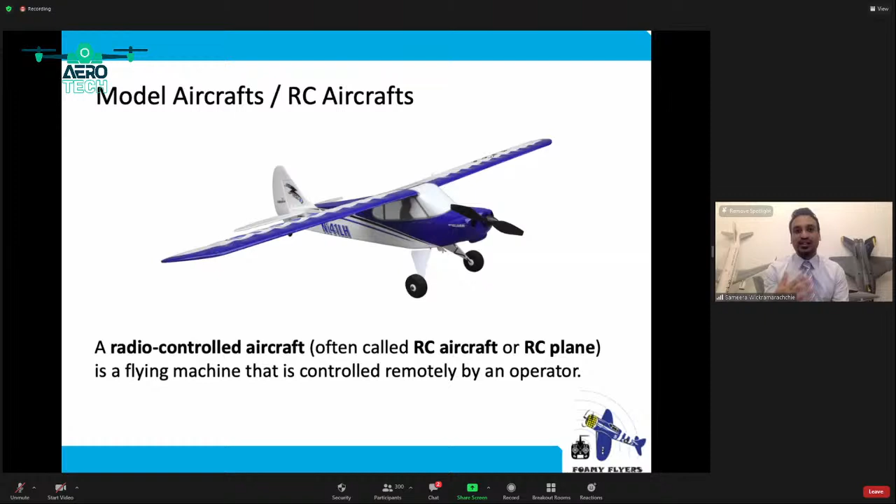And the other thing is, when you talk about a model aircraft, it can be a static model aircraft. It can be on your cupboard so that it looks nice. So we are particularly talking about an aircraft which can fly. So it's not a static aircraft. It's basically an RC aircraft. RC in the sense, it's a radio controlled aircraft. Moving on. Let's talk about the principles of flight first.

So normally you have 4 forces acting on a particular aircraft. These are the main 4 forces. I'm not going to go into very deep details on this, I'm just going to keep it very simple for you guys because of the time constraints that we have right now. And if you have any questions, as I mentioned before, please do ask. So normally an aircraft will have 4 forces. The first of which is the weight of that particular aircraft. That is basically the gravitational pull that is pulling the aircraft onto the ground.

And opposite to that, obviously, if we were to fly the aircraft, we need to have a lifting force. That is the lift, which is basically generated from its wings. And also when the aircraft needs to go forward, it needs to have some thrust. This is generated by a power plant of some sort. And opposite to thrust, you'll have drag. So normally, the higher the thrust you have, the higher the drag. It's like Newton's third law.

But I'm not going to go into a lot of details, let me just be very brief on these things. Right, so now you know that you have 4 forces. These are lift, weight, thrust, and drag. Right. So how is lift created? Like how does a wing create lift?

Let me be very, very basic on this. I'm hoping that you have seen a cutout of a wing. Normally it's cambered, so the top surface is rounded, but the bottom surface is flat. The reason why it is like that is, for example, if you think about two air particles hitting the front of that wing, the particle which goes on the top of the wing has to travel more distance because it's curved than the lower air particle which is traveling on the bottom part of the wing, right?

Does it make any sense? So the path for the lower particle is straight, but the upper path is rounded. That means you have to go further up and then go down to meet at the end point. So the upper particle, which has to go further, in order to meet up with the lower particle, has to go faster. I hope that makes sense.

So when the particles on the top of the wing go faster than the lower particles, you automatically create a vacuum. The particles are less on the top of the wing than the bottom. That in turn creates a low pressure area; the speed of the particle is fast, but it has a low pressure area. And you all know that air goes from high pressure to low pressure areas, right? That is how the wind happens and things like that.

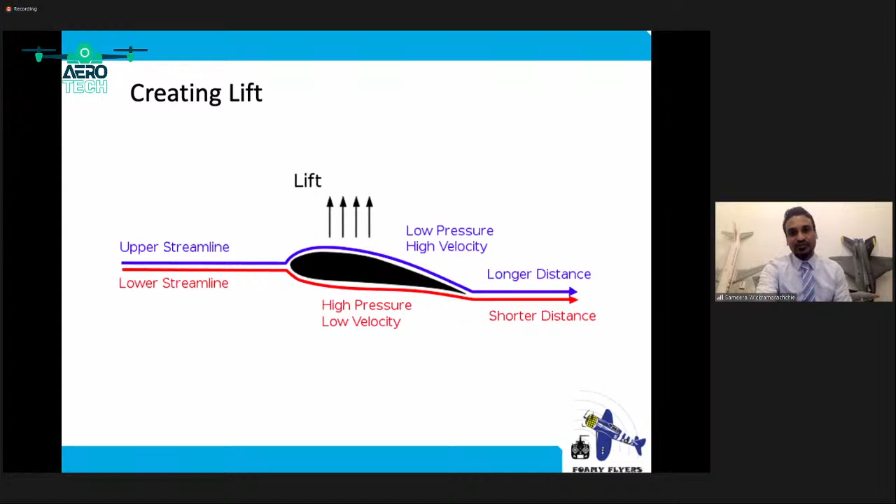Moving on, let's talk about the primary flight controls. Now, this is very important. I will use the words ailerons, elevator, rudder, thrust, and things like that. In this picture, you can see that you have ailerons on both parts of the main wing, an elevator, which is on the back of the tail part of the aircraft, and the rudder.

To give you an example of how these things work, I have a model aircraft. As I told you before, this is a static model aircraft. I think you might know this aircraft as well. This is an A380. So this is where the rudder is, right? And this whole section of the aircraft is called the empennage, or the vertical stabilizer and horizontal stabilizers. So you have the rudder, the elevator, and the ailerons on the corners of the main wing, right? Let's talk about the elevator first.

As I said, the elevator is here. When the elevator moves upwards, the air which comes and hits the elevator pushes the elevator down, right? So when you move the elevator upwards, this in turn pushes the aircraft down from the back, right? So in turn, the nose actually lifts up, right?

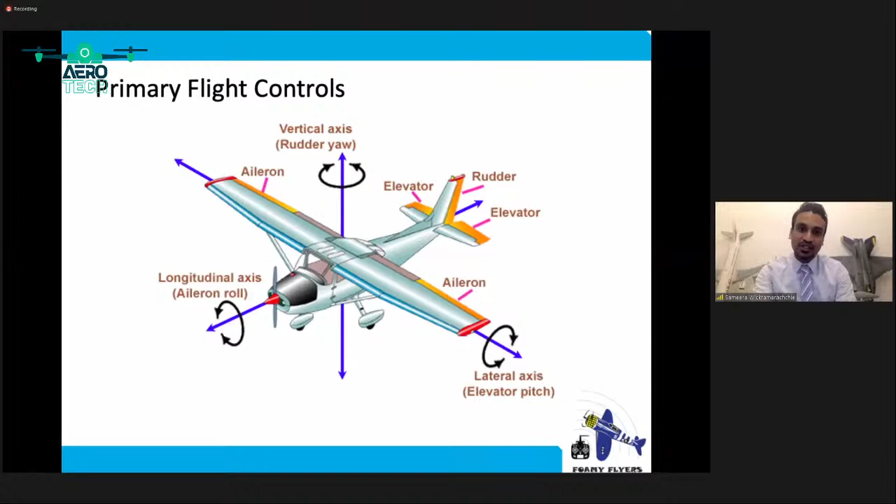I've actually included a bit more detail on flight control surfaces. Obviously you can see the rudder, the elevators, the ailerons, but you have the horizontal stabilizer, as I mentioned, and the vertical stabilizer as well. And also there are something called flaps and slats. Flaps and slats are basically high lift devices. What they do is increase the lift of that wing.

If you remember the previous slide, where I showed you how lift is generated, the lower part of it is straight, right? But what the flap and the slat do is extend the front bit as well as the aft bit, or the trailing edge of the wing, which in turn makes the aerofoil or the wing much more capable of generating lift.

And also you have something called spoilers. Spoilers, as the name suggests, basically spoil the air moving on top of the wing. They're located on top of the wing, and when deployed, they spoil the airflow, which means the lift is reduced on that particular side, or normally both sides, and it's used to slow down an aircraft, or sometimes even to turn the aircraft left or right as well.

Right. So here you can see a flap and a slat being deployed on the leading edge, which is the front of the wing, and the trailing edge, which is the back of the wing. You can see those are extended, and the surface the air particles have to move through is considerably more than when it was retracted. So you have generated more lift, right?

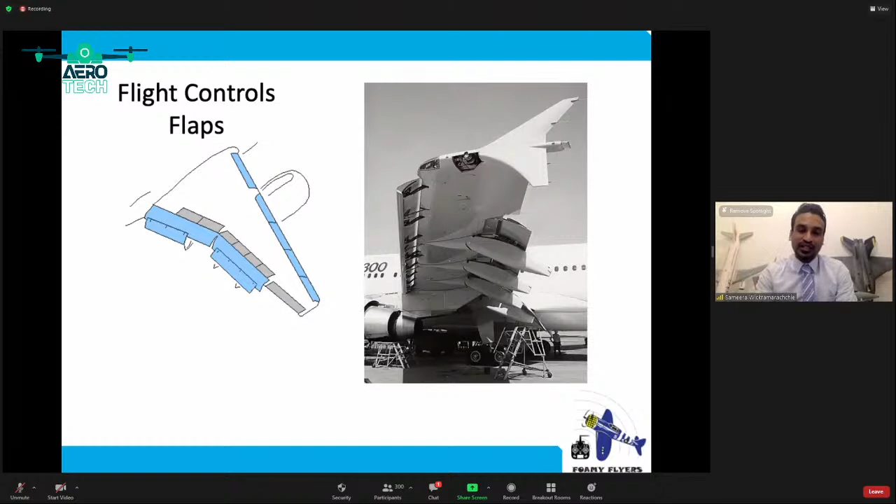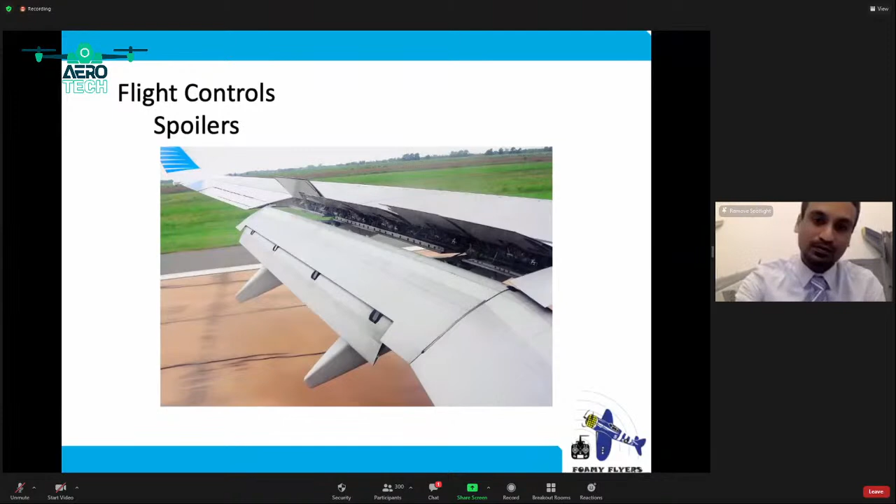Right. So moving on to RC model aircraft. Now I believe you've got to know the basics of flight and how an aircraft works. Now let's build an aircraft. But before we build one, we need to figure out what sort of aircraft we want to build, because some people might be very good at flying an aircraft, and some are not that good because they need practice flying.

So if you're a newbie getting into this hobby, I would strongly recommend buying or maybe building a trainer plane. Trainer planes are very easy to fly. They have very limited capabilities, such as banking. The aileron, elevator, and rudder controls I told you about before are limited, so it's easier for a user to fly the aircraft and learn the basics of flying an RC plane. And also you have gliders.

A glider is basically an aircraft which uses thermals. On a hot day, you can see that the air is moving up. Sometimes you can see tornadoes and things like that. Those are called thermals. Sometimes you can even push the aircraft through the air and it flies itself without any thrust generated on the aircraft. That means you don't particularly need an engine or a power plant for this, but you can fly it as a glider.

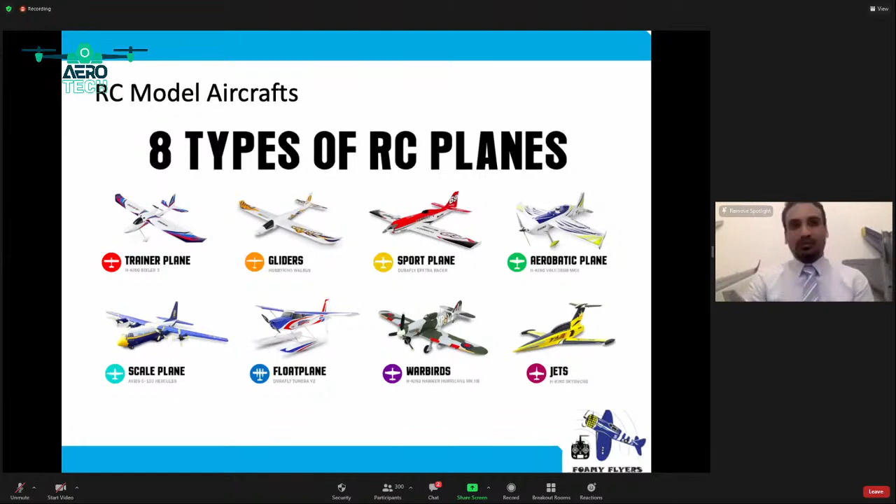But before that, let's talk about the basic requirements we need to build this particular aircraft. So airframe, those 8 airframe types you can basically buy or build as well. Power plant, you'll have to buy from some company. And electronics, transmitter and receiver, batteries, and optional accessories, which I'll talk about in much more detail in a few more minutes. Right, let's talk about the airframe.

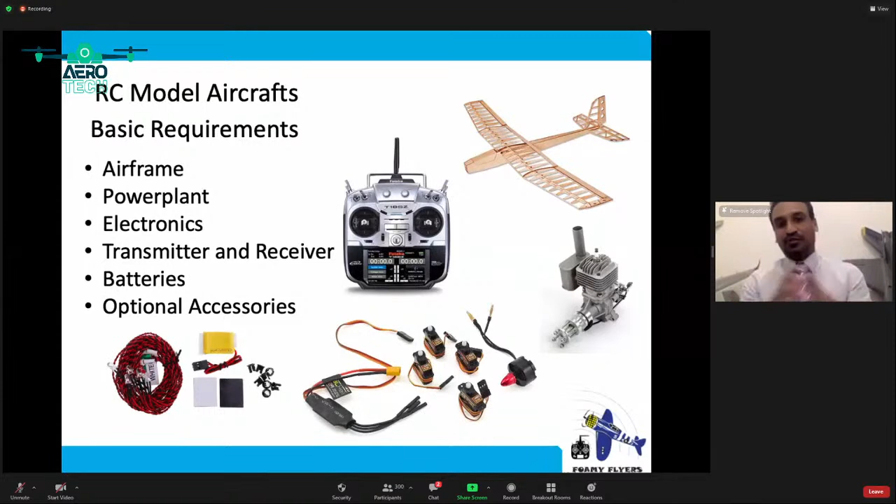So now if you have decided on an aircraft that you want to build, you can choose from either foam or balsa. These 2 materials are the most commonly used, in Sri Lanka and in other countries. Now, foam and balsa wood aircraft have different plus and minus points. For example, foam, or EPO, EPP, to put it in very basic terms, is basically a rigifoam.

A rigifoam aircraft, you can carve it at home, you can cut it with a knife, you can sand it down, you can make a lot of shapes with it, which is very easy. And obviously these materials are very easy to find. So most of us tend to go with either EPP, EPO, or maybe another material that is very easy to use.

Do we have a question? Hassan, do we have a question? I see somebody has raised their hand. Yes, sir. I don't see any questions here on my chat. So if you can narrate them to me, I can answer. There are a few questions. Yes. Right. So we do have a question.

How to define propulsion efficiency? Right. Propulsion efficiency is basically about the prop size and the motor. So basically, what's the power that you're giving to that particular motor and the output that you're getting from that particular motor. I will talk about these things in a bit more detail in a few more slides, but just to answer his question.

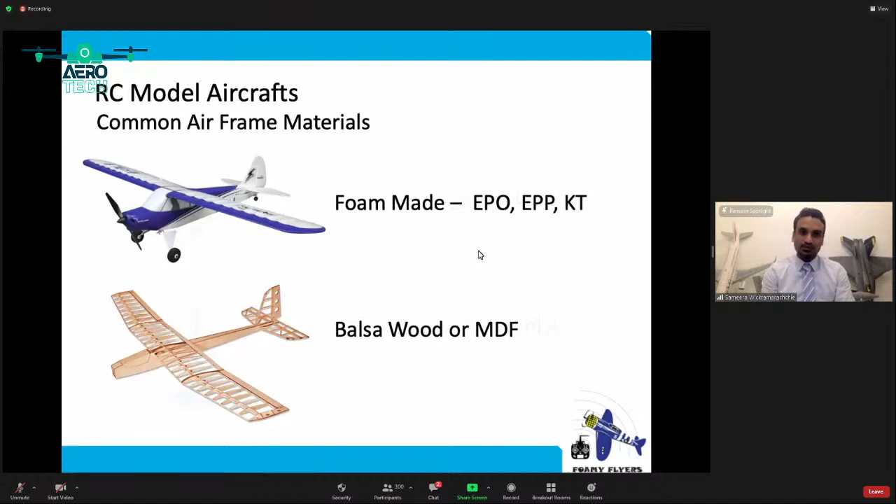But the only thing with this RC hobby, what you need to understand is eventually you will crash your aircraft. So when you crash it, you need to know how to repair it as well. So when it comes to balsa, especially when you spend quite a lot of money laser cutting it, or else you can even do it at home with some tools, but it's very difficult and time consuming. And if that particular airframe crashes and you have a breakage on the wing, then you'll have to replace the whole wing because it has been covered and everything has been done.

So moving on to other materials, apart from these two, we have fiberglass as well as carbon fiber. Nowadays, a lot of manufacturers tend to use fiberglass and carbon fiber because strength-wise they are very, very good. Only thing is that if you were to build something like that at home, it's very costly and the materials are very hard to find, and it's very, very difficult to manufacture at home.

So because of that, unless people are going into the hobby in a very serious manner, for example, designing newer aircraft which can withstand a lot of heat or resist water and all those things, you can build out of carbon fiber or fiberglass. But the process of building one is relatively harder than building it out of KT or MDF or things like that.

And then, as I mentioned, a newer technology which we have right now is 3D printed aircraft. The easiest part is that you get to print the aircraft at home and then glue it together. And the best thing is if you crash it, you can print that particular section and glue it back together as well. But it takes time. Normally 3D printing an aircraft will take quite a lot of time. The other thing is that if you are very good with design software, you'll be able to design your own aircraft at home and then fly it and test it without having to download somebody else's design, which in turn means you'll learn more about how it works.

You now know how an aircraft works, how we need to get things working, and you get to know what you have built without having to buy it off somebody or download it from another place and print it. And the other thing is 3D printing is getting very, very inexpensive, because a lot of people started doing it, and even 3D printers are relatively inexpensive.

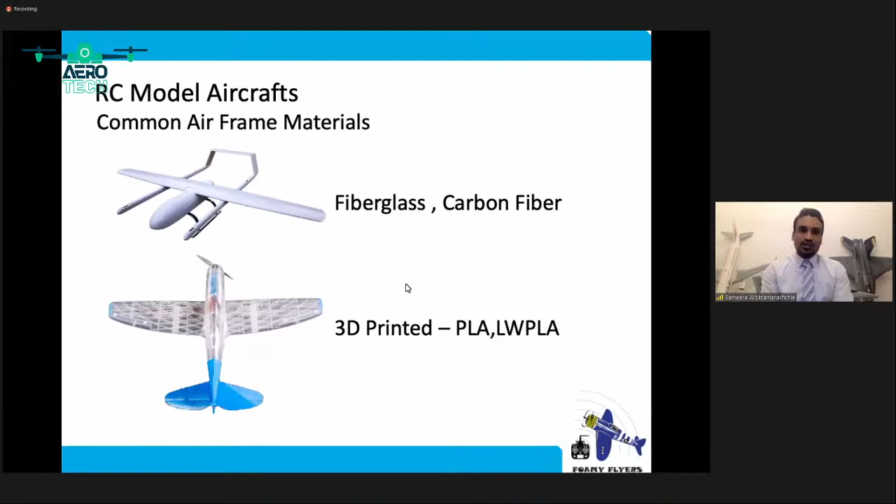Okay, so now you have selected the material.

Hassan? Yes, sir. I'm getting this request to control my screen. Is that from you guys? No, sir. You can just continue with the session, sir. Yeah, because I have to keep on declining that every time. Anyway. All right, sir. Don't worry. Our technical team would look into it, sir.

Sure, thanks. So now you have decided on what are the materials that you want to build the aircraft. Now we'll talk about what are the common aircraft frame types. For example, you can have these particular types which are in the picture. Normally, the most commonly used aircraft type is the straight leading and trailing edges wing, which is very good for training newer pilots on the behavior and how to fly an RC aircraft.

And the other thing is, when you're talking about delta wings and swept back wings, those particular aircraft need a bit more speed to fly. So when you have more speed, it's pretty difficult to control the aircraft unless you're a bit of a seasoned pilot. Or else, if you are good with flying an aircraft, these two are good opportunities for you to enhance your skills in flying an aircraft.

And when you're talking about common airframe types, these 6 are not the only types that you can build, there are others. For example, where the wing is mounted comes into play as well. So you have 3 different criteria for your wing: high mounted, mid mounted, or low wing. So likewise, you can choose the airframe type you're going to build and how the wing has to be mounted, and depending on your requirement, you can choose how to build your aircraft.

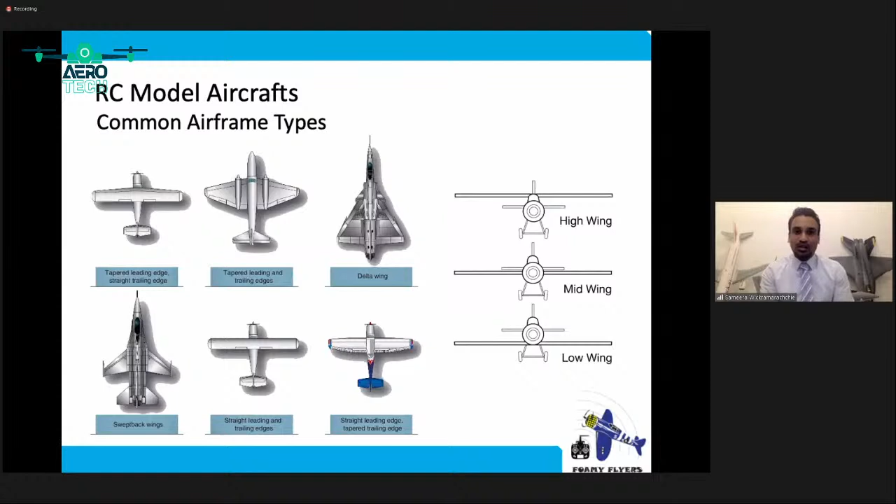What I'll do is I'll share some links where you can go and download your particular plan. There are some sites I'll put on your chat at the end of this session, so that you can have a reference of the available aircraft. And you can even choose whether to have it 3D printed or made out of KT or foam boards as well. So you have that option as well.

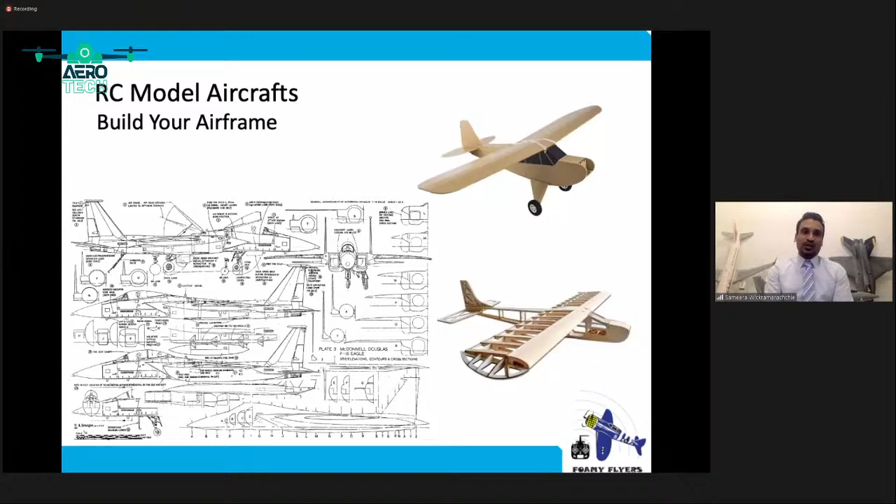Okay, now let's get to the power plant. Back in the day we did not have such efficient power plants, especially for RC aircraft. Some people even used rubber bands, which rotate the propeller and move it forward. But nowadays the technology is much more advanced, and we're using what is called a brushless motor. Brushless motors are defined by their particular kV ratings.

So over here, I have a brushless motor. This is connected to a propeller, obviously. And as you can see, this has three wires coming out of it. I'll show you what it actually does. Normally, a motor would have only 2 wires, but this one has 3. And this is rated at 1400 kV. kV is the constant velocity. That says that this particular motor rotates 1400 times per minute at a given 1 volt.

So you can get the idea of how many rotations it does, but it does not mean that the higher the kV, the more power you have. It does not work like that. For example, if you get another motor, this has less kV. This is around 750 kV, but this will have more power than the 1400 kV depending on the propeller it uses.

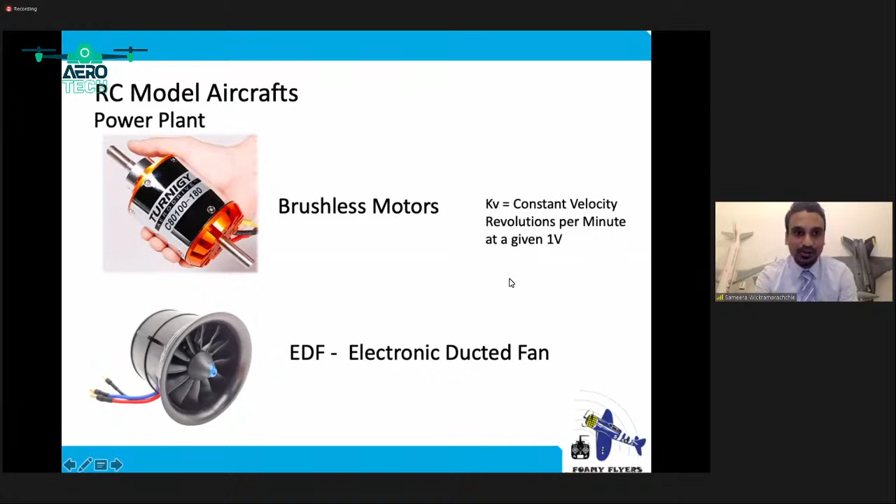And also, there are nitro engines. I think these are very commonly used for balsa wood aircraft. I'm not saying that these cannot be installed on KT boards, but normally, as you know, when you have a piston which is going up and down, there will be a lot of vibrations. Because of that, the vibration will make the airframe very unstable. That's the reason why this is only used on basically either...

Somebody's in the waiting room. I'm getting those messages. Hassan, can you check on that, please? Sir, it's better if you could just ignore the access and just go on, sir. Okay, right. Are there any questions since I stopped? Yes, sir, a few questions. I'll just shoot out one.

So the question is, can you please suggest any open source or free aircraft designing software with simulation? Sure. Normally, if you were to design an aircraft, I would suggest going with XPlane. This is something that I used when I was doing my degree. On that, there's a separate section called plane design or something like that, which I can't remember. But you can basically build your aircraft. You can give all the parameters to it, design the aircraft to those parameters and even test it on that particular simulator.

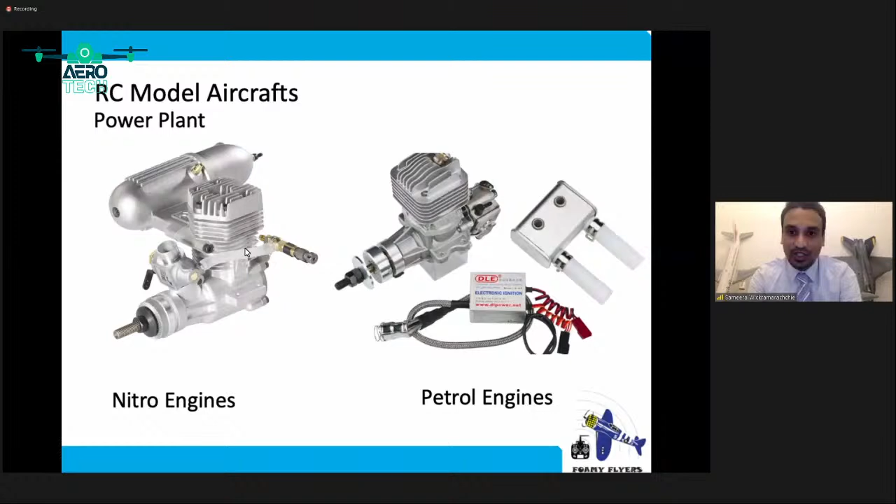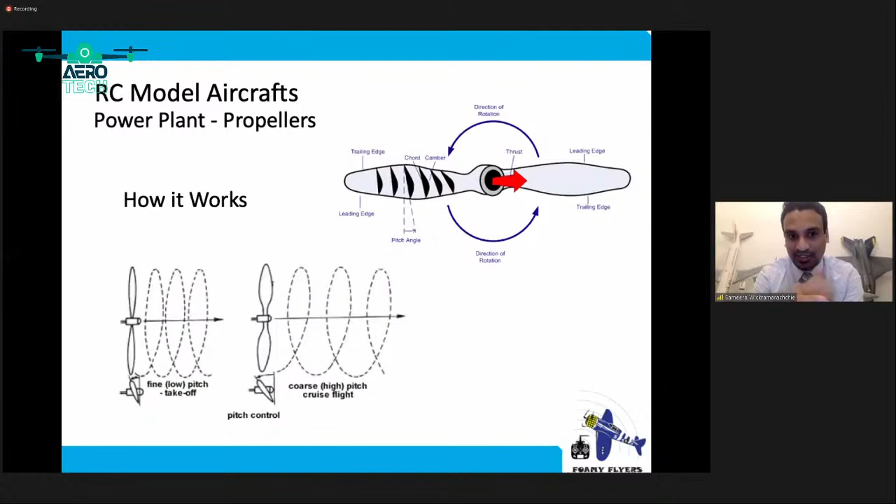And going on with the power plants, obviously we talked about the propellers and how they work. Just to give you a brief introduction, a propeller basically works like a screw. It rotates and it goes forward. Normally a propeller is actually a wing, but it's rotating on a certain axis. So similar aerodynamics and effects apply to this as well. But just for you to know, this is how it works. And as I said, it works like a screw. And also to talk about the propeller sizes.

Now, I have some propellers here. This is a carbon fiber propeller, which we normally use most of the time in normal aircraft. And this is a plastic propeller. And we have another propeller, which is much harder and much more resistant to bending and all. So these two are pretty much different.

We don't use this particular propeller on an electric motor. This is actually there so that you can use it on a nitro or a normal engine. The reason why it is harder is that this is made out of another material than this one, so that this is not going to heat up. And the other thing is that this is not prone to vibrations as well. I'm not saying that these are not vibrating.

The tips actually do vibrate, but because we are using it on an electric motor, that's actually been counterbalanced as well. The other thing is you need to balance your propeller on a stand. If you search on YouTube or things like that, you'll be able to know how to balance your propeller. Those are basic stuff. Normally you don't need to, but I would recommend that you balance your propeller before you install it onto your airframe.

And talking about propeller sizes, I mentioned that normally a propeller size is mentioned on the propeller. So in this particular case, it says 12 by 6. 12 is the diameter of the propeller, in inches. And 6 is the pitch of the propeller. So normally, if the propeller is rotated one rotation, in ideal conditions, the propeller should move 6 inches forward.

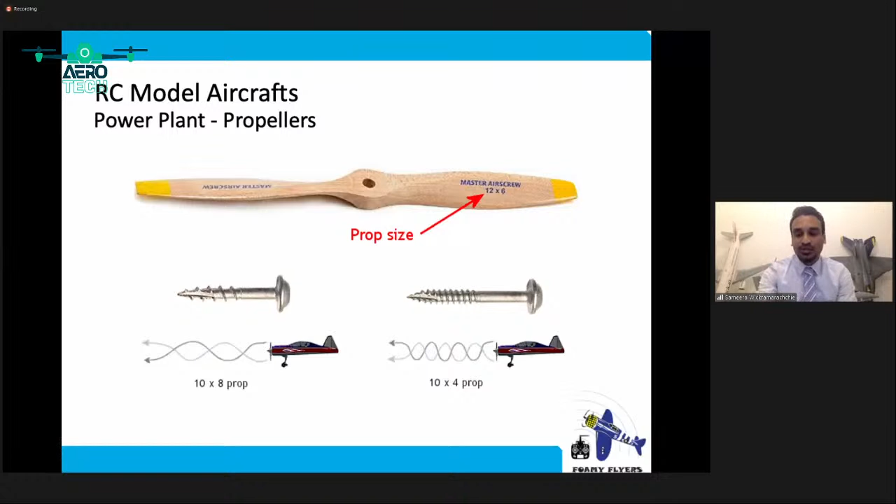For example, you can use a 12 by 6 propeller, and on the same motor you can use another 10-inch propeller, which has less diameter. That means obviously the thrust is going to be less. However, the motor loading will be less as well. So you'll have to consider those things as well. Right. So there are so many variants of propellers that you can choose from.

For example, if you were to go with a scaled aircraft, let's say you're going to build a C-130 Hercules or something like that, if you see the real aircraft, you can see that it has 4 blades on a propeller. It doesn't necessarily mean that you need to put a 4-bladed propeller onto the scale model that you're building, as long as the propeller will give you sufficient thrust to carry the aircraft forward or fly the aircraft.

And also there's something called variable pitch propellers. Even nowadays, a lot of aircraft use it, but we're talking about RC models here, so not a lot of people would use it on RC models, because these are a bit complicated. But you can have variable pitch propellers as well. That means the pitch of the propeller will change according to your need, and then you can have better performance depending on the flight status. Okay, moving on.

Hassan, do you have any questions? No, so we can continue. Okay.

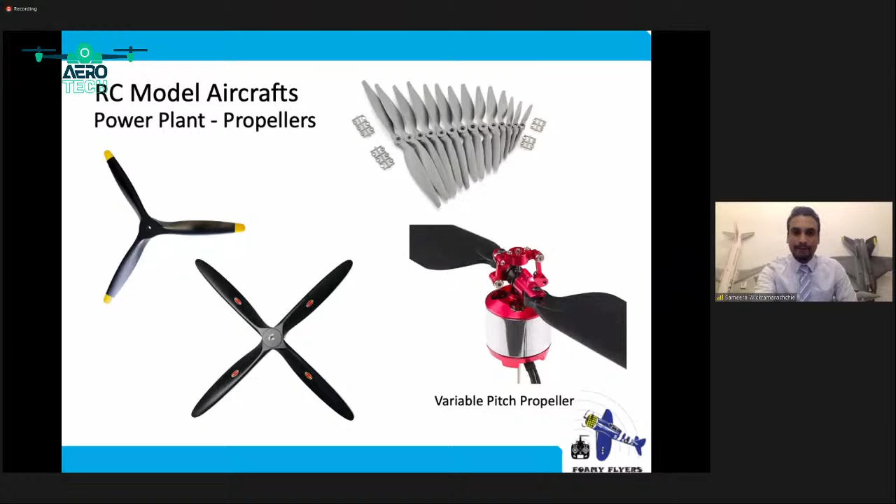Right. We'll talk about the electronic speed controllers. That's one of the main things which powers this particular aircraft. When you say power, you would think, okay, you put a motor, you put the battery, and then you fly. That's not how it's going to work. You need to have a speed controller to control the speed of the propeller, so the speed of the motor in a sense.

What a speed controller does is get the power from the battery and then distribute it to your aircraft as well as to the motor. So now I have a speed controller here. This is rated at 35 amps. You can go way higher depending on your requirement, and they will get much more expensive as well. These are around 2,000 rupees or something. But having said that, you can increase the efficiency of the aircraft by changing these as well.

And the other thing is, this is for electric motor driven aircraft, and there's another requirement: if you're not flying an electric motor driven aircraft, let's say you are flying a nitro aircraft, then obviously you need something to power it with. So there's something called UBECs that you can get as well. What it does is the same thing. You get power from a battery and then distribute it without any interruptions throughout the electronics that you have on your particular aircraft.

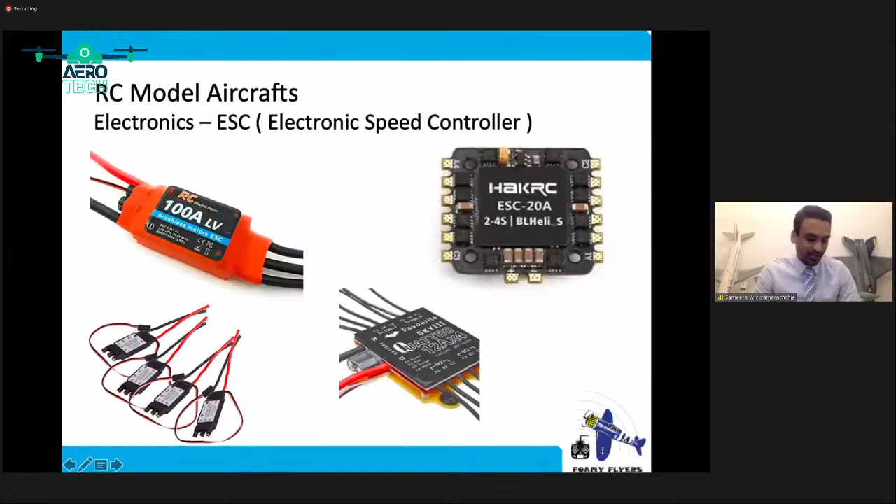Right. Let's move on to servos. So servos are used to basically, the main priority of the servo is to control the control surfaces of the aircraft. So aileron controls, elevator controls, rudder control. And if you have a nose wheel, normally a nose wheel to steer the aircraft is basically connected to rudder. So you'll have to have a servo to steer it or move the surfaces up and down.

Now, most commonly used are micro servos and nano servos as well, but there are standard servos that you can get as well. So this is a standard servo. This will have a rating on it and how much torque it generates and things like that. And also it will have power ratings as well. And this is a micro servo. So you can see the size differences as well. So as I mentioned before, depending on the requirement of the aircraft that you want to build, you can choose whether to have this or the bigger one.

And the other thing is, the reason why I have the internals of the servo mentioned on this particular picture is that you can have servos which have gearboxes made out of metal as well. So obviously when you have metal gearboxes, then you can have more torque on those servos.

So for example, I have this KT build aircraft here. You can see you have 1, 2, 3, 4 surfaces, which are connected to only two servos. So because you have 4, basically one servo runs 2 surfaces, and if you were to use a normal servo, then obviously that will tend to break because of the power that is required to move those surfaces. Because when you're flying through the air, the surfaces will have a bit of air resistance to move up and down. So you'll need more power. Because of that, we have metal gear servos, which I have included on this, so that it will be easier for the servo to move up and down.

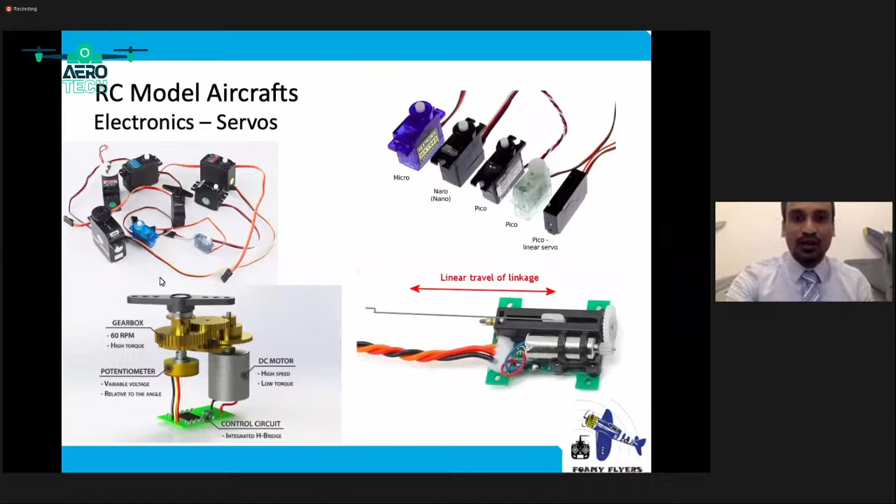So when you are designing or building an aircraft, you have to consider what sort of servo you're going to use. Especially, you don't need to use a bigger servo if you don't need that much power, and that in turn will save a lot of weight and a lot of money as well at the end of the day. Moving on.

Okay, this is the most crucial part of the build, I would say, because a lot of people would say that RC hobby is very expensive. Partly it's because of this. You can buy a very cheap radio and a very expensive radio. The prices vary quite a lot. However, it depends on your requirement, as I mentioned before. If you're spending quite a lot of time building an aircraft, you would want that to last. As I mentioned, you will eventually crash it one day. That is how it is.

However, you don't want to have a bad radio or bad radio communication within the aircraft and make it crash because of that. So you would want something reliable, something very good, so that you have a solid signal, that you will not get any interference from other parties, and that you will have a proper connection to the RC aircraft.

Right, let's move on. So as I was mentioning, there are basic transmitters as well as advanced transmitters. Now, when I say basic, you might remember that I told you about all the control surfaces like ailerons, elevator, rudder, and thrust, or the power, has to be there. So ailerons will take one channel, elevator will take one channel, rudder will take one channel, and thrust will take one. That means 4 channels already gone.

So if you were to buy a transmitter which has 4 channels, you can easily fly an aircraft with all these functions like elevator, rudder, and ailerons. And the other thing is, if you by any chance have a radio which can only manage up to 3 channels, what would you do? Like, okay, now you need to go up and down. So obviously that needs to be there.

So elevator control, obviously you need to have. That's one channel. And then you need to have thrust, that is onto your motor. So that's channel number 2 gone. So you have ailerons and rudder. What would you choose? You only have 3. So my recommendation for you guys is to use the rudder,

because the ailerons and the rudder basically do fairly similar things. As I mentioned before, rudder is the one you use to steer the aircraft, and ailerons turn or bank the aircraft. But when you're using a rudder input, normally an aircraft would tend to turn or dip to that particular side anyway. That's why you normally use something called a coordinated turn.

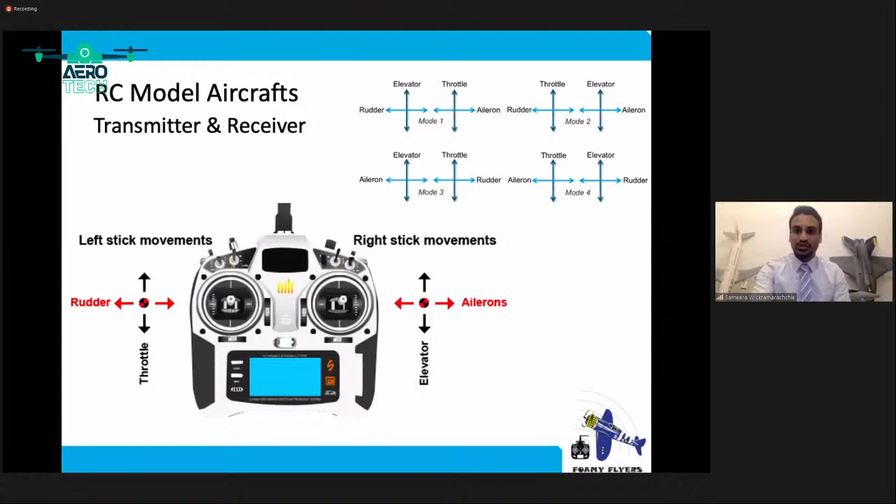In this picture, you have a Futaba receiver, and I have a Futaba receiver here, which came with my transmitter. Normally, when you buy a transmitter, you'll get a receiver, but if you want more receivers, you can buy them separately. These are a bit expensive compared to normal receivers. This one would cost you around 15,000 rupees. So even if you have an aircraft which costs less than that, the receiver and electronics will cost you quite a lot. So you need to have your aircraft in tip-top condition.

And I know that your first aircraft will eventually crash anyway. You'll have to be ready for that, and be ready to rebuild it again as well, so that you learn from your mistakes and know where to improve.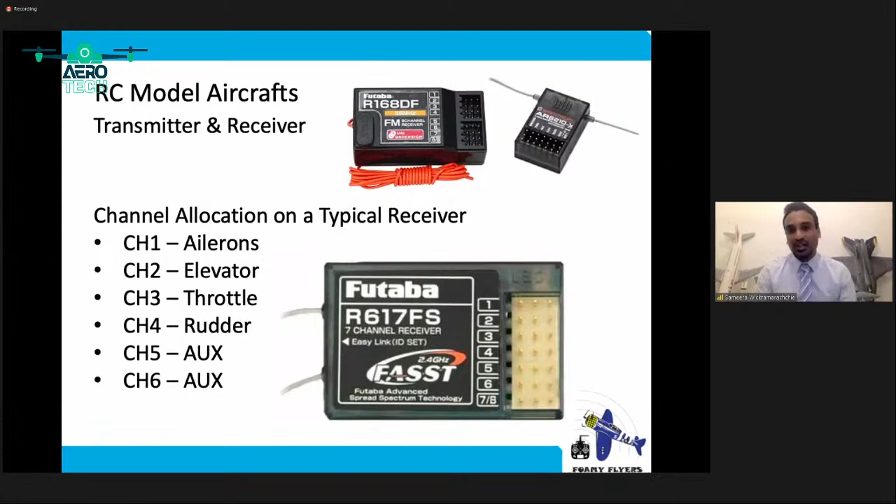But some radios might not have that feature. So if you have something like that, then you need to check all these control surfaces and control levers are at the right position before you turn on your particular aircraft. Because there are some instances where when you plug in, the motors will start and then injure somebody, or maybe damage the aircraft or somebody around you. So that's how it is when it comes to receivers. And then you have to wire it properly as well.

So when I said wiring it, when it comes to servos, you have this connector here. This is always color coded. Normal color coding is basically white, red and black, but nowadays you can get cables which have orange, red and brown as well. And there are older versions which had blue, red and black as well. But any of these has to be connected at the right orientation. The white carries the signal, and red and black are for positive and negative power.

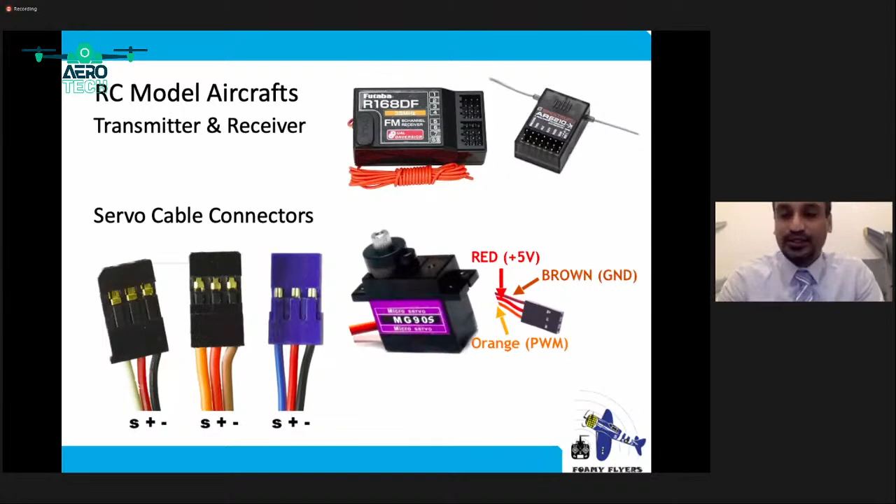Right, let's move on. Now, this is also very important. Hassan, were you going to ask me a question? So I'm sorry to interrupt.

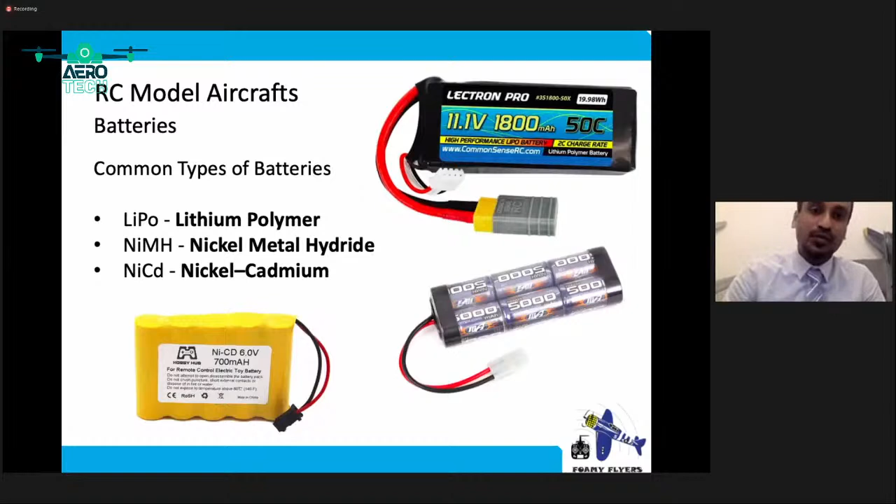These are not to be messed with. This has very high discharge rates, and especially if that particular battery is damaged, it is more prone to catch fire and things like that. So we need to be very careful with that, and especially if you have a crash and you have a damaged battery, I would suggest that you do not use it and dispose of it as mentioned by the manufacturer. This picture shows how the battery is connected together. It's connected with cells.

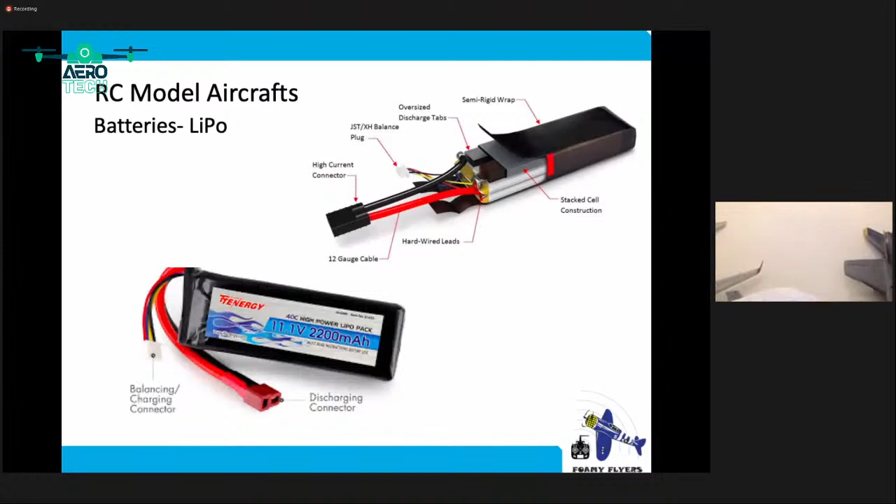I have some batteries here. Right. So normally a battery would have a connector, as I mentioned before. Because the battery is connecting to the ESC, you'll have to have the same connector on the ESC side as well. I'm not necessarily saying that you have to, because there are some converters that you can get, but it's easier for you if you have the same connector on your ESC as well.

So for example, this is a battery which is rated at 1500 milliamps. This is a 3-cell battery. You can see the cells here, 3 of them. And you have this balance charging port here. This is what you use to balance charge the 3 cells. So basically it will charge the cells individually and then they will be balanced out as well. And then this connector is the discharge connector. You have it on a Deans plug or a T-plug connector. So if you were to have your ESC connected, you can basically connect it straight away, right?

But if you have a battery which has an XT60 connector like this one, you cannot connect it. So either you remove this connector and replace it with an XT60, or you'll have to get an XT60 to Deans converter to connect it. But if you're building an aircraft, then obviously you should be able to change this over, or when you're buying your parts, you can choose what the connector type has to be.

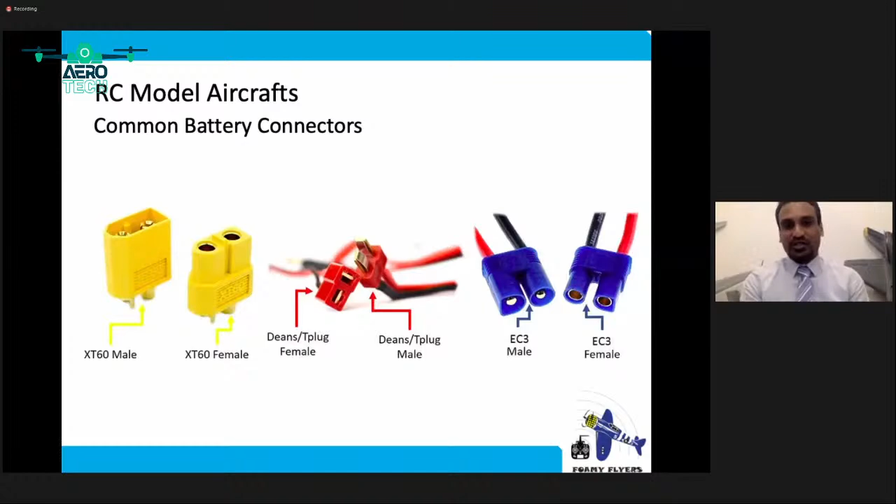And let's talk about battery charging. Now you cannot charge a LiPo battery in a normal charger or power pack or anything like that. You need to have a balance charger for that. Otherwise, the battery will be dead before you know it, or damaged. When you have a balance charger, the charging will be maintained properly. Otherwise, you might end up having a burst battery or maybe fire damage as well.

And the other thing is you'll need to have something like this, if you can, to store your batteries when they're charged or not used. Because this is a fire retardant material, if you have a fire in the batteries, it will be contained in this. So, as I mentioned, you need to have a balance charger for this.

And the other thing I want to show you, this is actually a battery cell checker. So if you are out in a field and you want to know the battery levels are good. Normally, with normal batteries, we use them until they drain out. But for LiPo batteries, you cannot do that. You need to have a bit of power left, like 20% on this particular battery. If it goes beyond that, it will damage the battery.

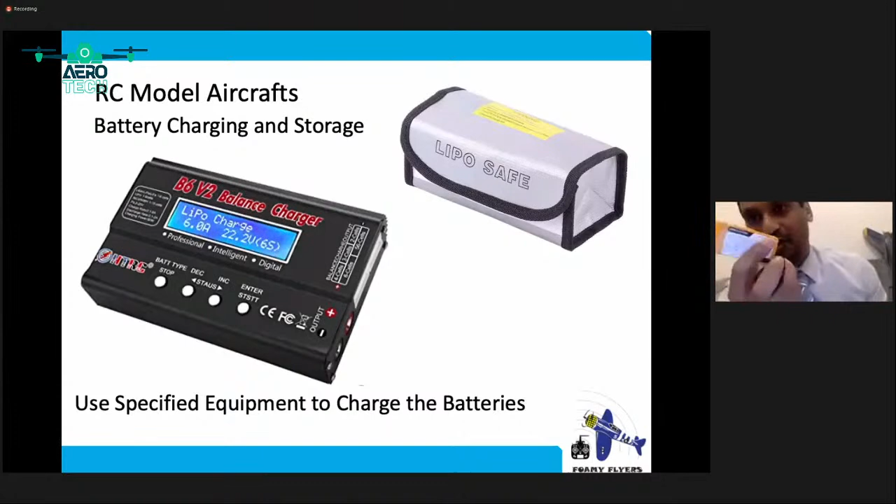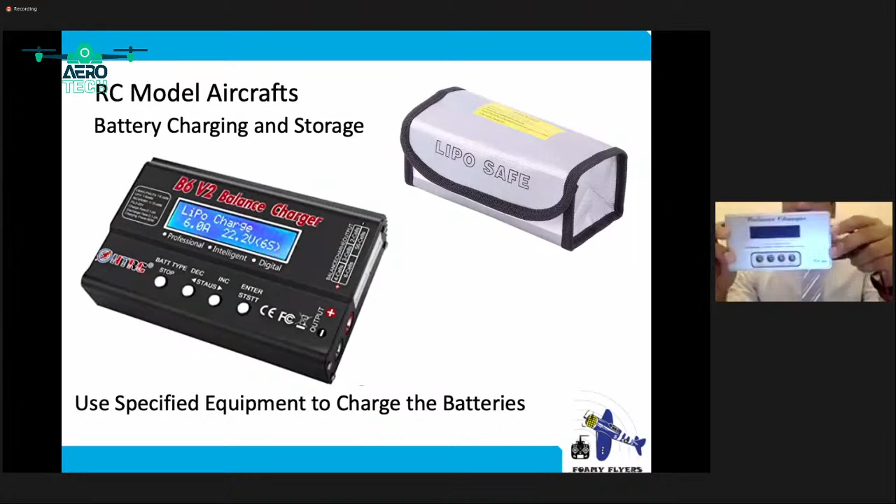Because of these COVID issues and all that, I have not been able to use this battery for a long time. Now it has started a bit of a puffing effect, which is not a good sign, because it has to be discharged if you're not using it. On this balance charger, I have one right here, there's an option to discharge. So what you need to do is discharge your battery if you are putting it into storage or putting it away because you're not flying.

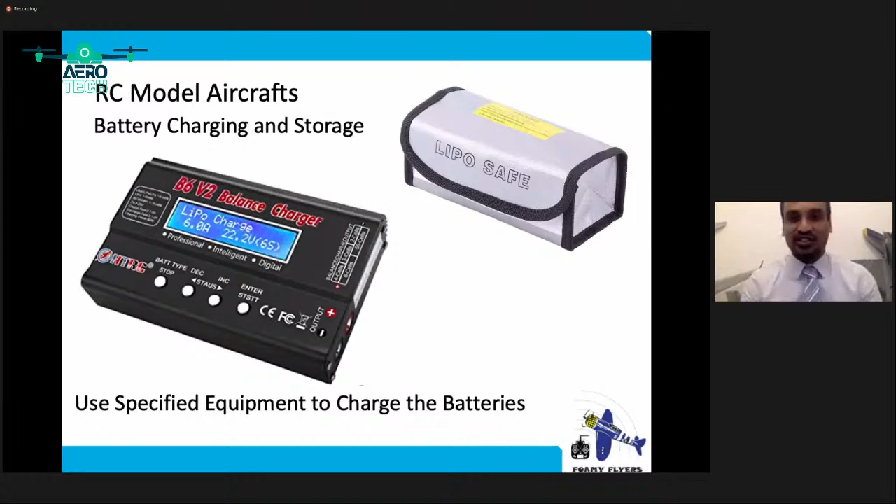Normally we used to fly every Saturday, but since we're not doing that, might as well get all the batteries discharged and keep them in a safe place, like a safe bag. So if your battery is like this, I would highly recommend throwing it away, not just throwing it away, but disposing of it carefully as per the manufacturer's information.

Now, I have a battery here. I think you can see the difference between these two. So this is puffed up. It is in a bad state. I would not recommend using this because it might be able to hold power, but when it is getting discharged, it might catch fire as well.

You might be flying your aircraft and the battery gets heated up to a point that it catches fire, and then it might do a lot of damage to your aircraft and to people below it or some property as well. So you need to be very careful. And especially when the batteries are charging, you need to keep a proper eye on them, to know whether the cells are charging properly or not.

And you need to check regularly, because normally these batteries take around half an hour to 45 minutes, depending on the cells and the amperage of the battery. So you need to check whether it's being charged and that there's nothing shorting in the circuits. We've seen a lot of people having very bad experiences when batteries explode. So you'll have to be very careful.

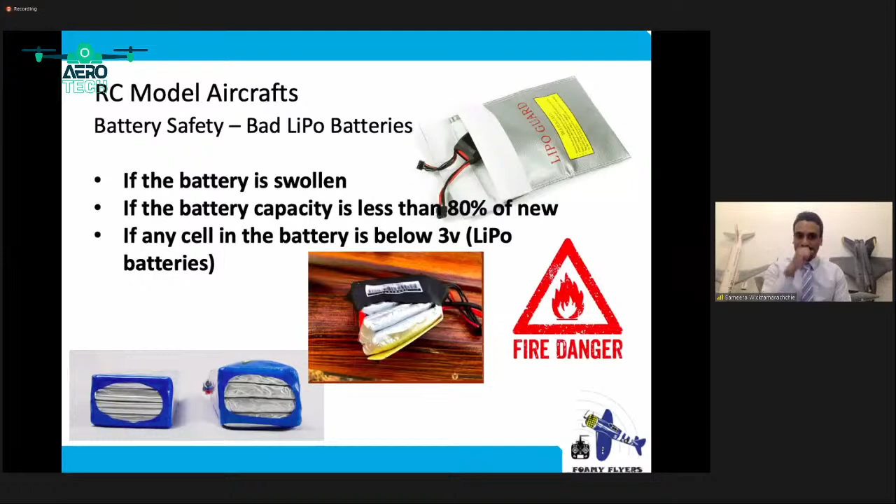Right. Let's talk about model aircraft optional accessories.

Onto your particular aircraft, but let's keep it as a model aircraft for now. So you can even install something like a landing gear set. So this is a retractable landing gear, which looks nice. It has a shock as well. And by doing this, this is not gonna make it a drone, obviously. This is for aesthetic reasons.

And obviously you need to find out whether this is gonna add a lot of weight. As you can see, this is a bit heavy. This is for a bigger model aircraft anyway. So you need to find out whether this is worth doing. So some people might put on lights and maybe retracts and all these kind of things, and you might not be able to fly the aircraft because it has gotten heavier.

So likewise, as I mentioned, okay, Thavin Dias is raising his hand. Shall we ask a question from you, Hassan? Hassan? Yes, it would be much more appreciated, Mr. Thavin, if you could keep your question and we could discuss them in the question and answer session because of the time constraints. Right. I'll try to go through this a bit fast if required. Then we'll have a bit of time for question and answers.

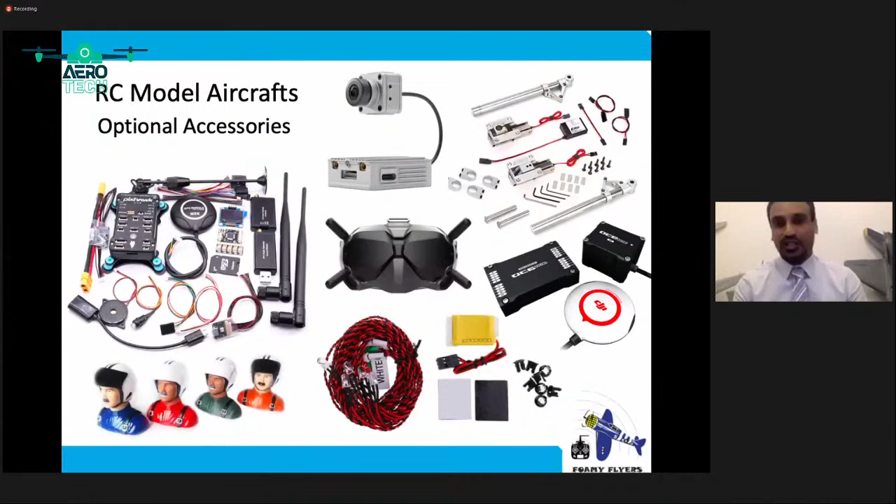Let me go to the last slide of today's on the aircraft assembly. So we talked about all of these things and how this is connected. This is how a motor is connected, and a LiPo battery is connected, ESC is connected, receiver is connected, and everything is here on this particular picture. So now you know how an aircraft would work, how to wire it up, how the motors should be there.

And the other thing is, for example, if you have a normal motor rotating in a particular direction, if you want to reverse that direction, then you would reverse the polarity of the connectors, right? But in these brushless motors, you have 3 wires. What you need to do is basically disconnect 2 of the connectors, change them, and then connect them back in again, and then it will rotate in the other direction that you want. So that is how it is.

Now, Hassan, do you have a bit more time for me to go through some 3D printing as well? Sure, sir.

Right. So that's the basics of building an RC aircraft. As I mentioned, I've put on all these links for where you can download these models on the web. There are some which you have to pay for, but there are a lot of places where you can get them for free. You can download it and then even build it yourself, which is very easy. And then all you need is this particular electronics, and you're good to go. You're ready to fly.

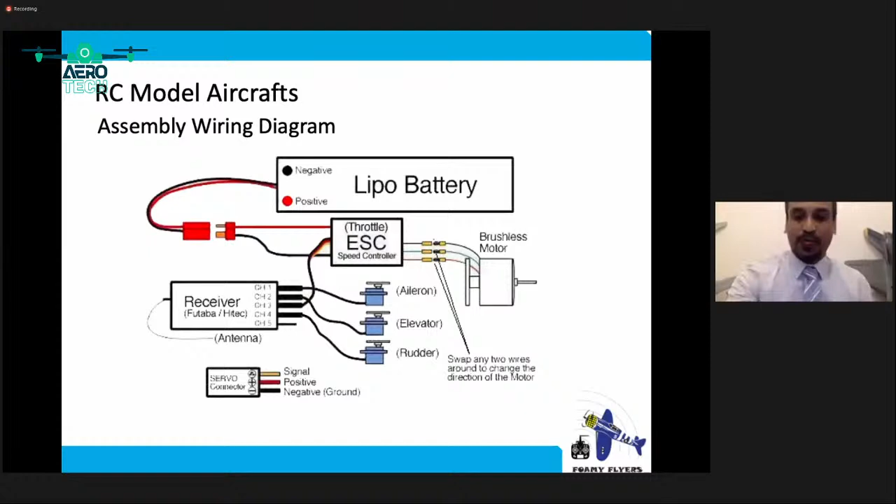But as I mentioned before, please be careful with what you're doing. Please adhere to all the safety instructions given to you by the manufacturer, especially when you're dealing with LiPo batteries, and especially when you're activating an aircraft. As I mentioned, it can go horribly wrong. I'm telling you from experience, it happened to me. So make sure that you don't get yourself injured. Right. So let's move on.

Another example of how to build your aircraft is 3D printing. Now, as you may all know, 3D printing has done a lot of things right now. I think 3D printing only started around, let's say, 5, 6 years back. So I was fascinated by the idea as well, and I did some research, and then I built my own 3D printer. And up to today, it still works, and I do get a lot of 3D prints done. Let me show you some of the examples.

So this is an aircraft which I'm designing right now. This is 3D printed. So as you can see, everything is customizable because you are designing it. You can have everything for your requirement. This is very light as well, because of the size, obviously. But this is plastic. For example, the geometrical symmetry of this particular aircraft might not be achievable with just normal KT boards or foamy manufacturing methods, but we can do that as well.

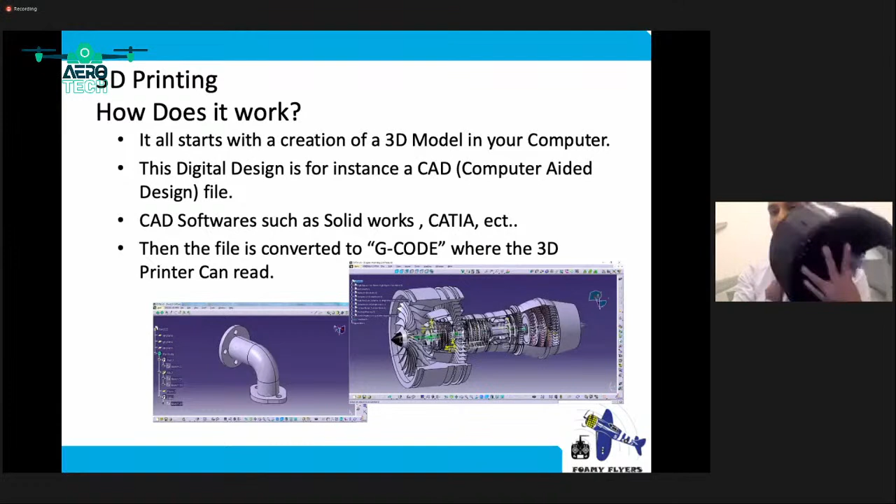And high precision items, such as this one, this is an actual jet engine replica of a Trent. I believe it's a Trent 900 engine. So this has been 3D printed. It has not been finished yet. This takes a lot of time. That's one of the downsides of the 3D printing process. However, you can do a lot of things with it.

Now, normally, if you are good at design software, especially 3D design, you'll be much happier using these kinds of technologies. But having said that, there are a lot of opportunities where you can learn these things and do it as a profession as well. You can have a business with 3D printing, especially prototyping parts; even day-to-day parts you can print and manufacture for yourself, even for others if they require. So normally how it works is you do a CAD design, and then that CAD design will be converted into G-code.

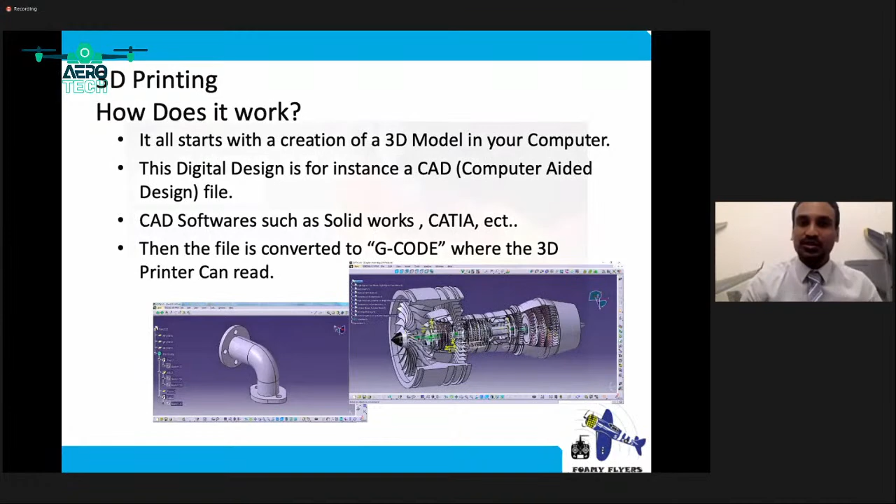So to convert that into a G-code, there are some softwares as well, like Cura and something like that, then you can basically convert that and then get it printed. So this is how normally 3D printing works. I'm sure that a lot of people have seen this.

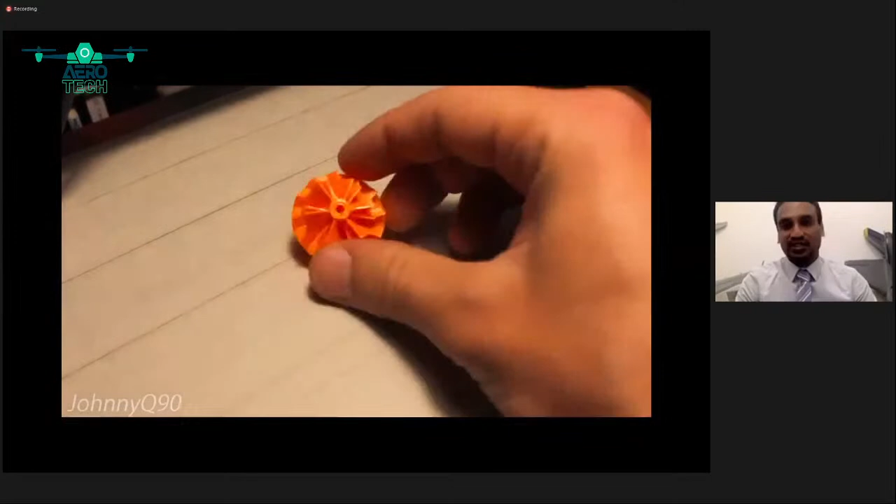This video has been sped up. This is actually not my printer. This was taken from YouTube. I did not have any time to record my things till even today. So this is actually an impeller which they are printing right now. You can see the precision of the print, and that you will not be able to manufacture this sort of an impeller at home without a 3D print. And if you can see the size of it, it's much more accurate as well.

And this is something that I've done for Sri Lankan Airlines. So this is a USB port which is in Airbus A330 variant aircraft. Normally in these ports, the front part actually gets broken by usage. So in order for us to replace one of these parts, to put an OEM or original manufacturer part, it'll cost around 90,000 rupees each, just for that USB part. Normally aviation parts are very expensive.

So we came up with an idea of 3D printing. This has not been implemented yet, but this is sort of like a test part that we've done. We can do it for less than 2,000 rupees per part, in-house design and 3D printing, and then we can install it. However, normally aviation parts will have to be certified, so the certification is a bit of an issue. However, they are working on it. This is sort of an example for you guys, so that you know what opportunities are available for 3D printing in the near future.

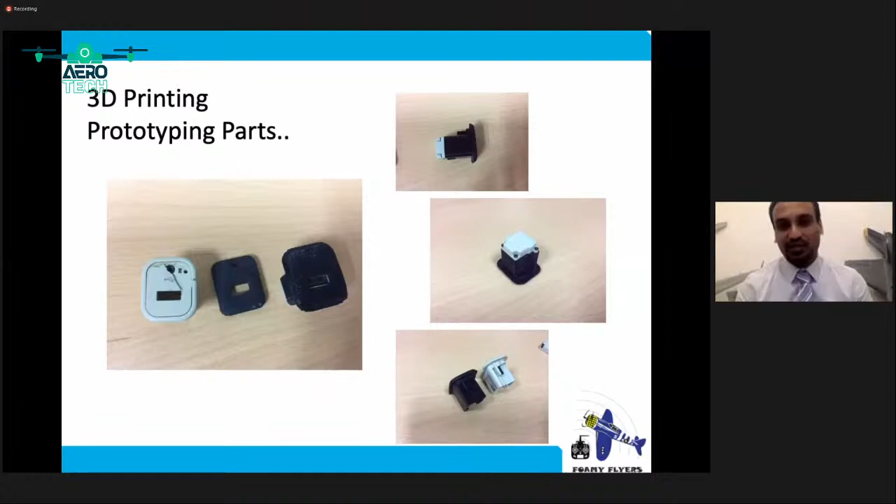This is one or two of these engines which were printed at home.

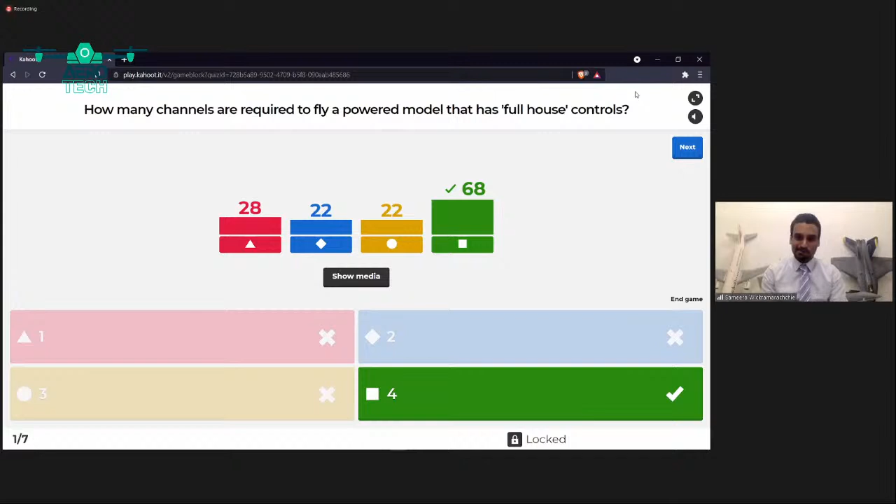Yes. So how many channels are required to fly a powered model that has full house controls? As you know, through today's session, we had a discussion on this. An airplane's functions are controlled through channels. So how many channels are needed to have a full house control? Yes, the time's running, guys. And great. So for a full house control, we need 4 channels, and 68 of the participants answered it correctly. So let's see who's leading. Great. Through the first question with 984 points, Prabhash is leading. Moving on to the next question.

Which channel or receiver output in a 4-channel radio is usually assigned to the elevator control surface? Another general question which was discussed. Clock's ticking. Yes, answers are coming in. So I guess sir mentioned about having 3 channels as well. Somewhere there, the answer is hiding. Great. So 79 participants have answered it correctly. So let's see who's on the lead. How the tables turn. So Amod, I guess, is on top right now with 1,837 points. Moving on.

How many wires are in a typical servo extension cable? We saw a lot of wires and color codes. I hope you guys remember. And here goes the time. Great, 108 people answered it correctly. And moving on. Wow, now Deshan is leading with 2,696 points. Great, great. Moving on to the next question. It's question 4 out of 7.

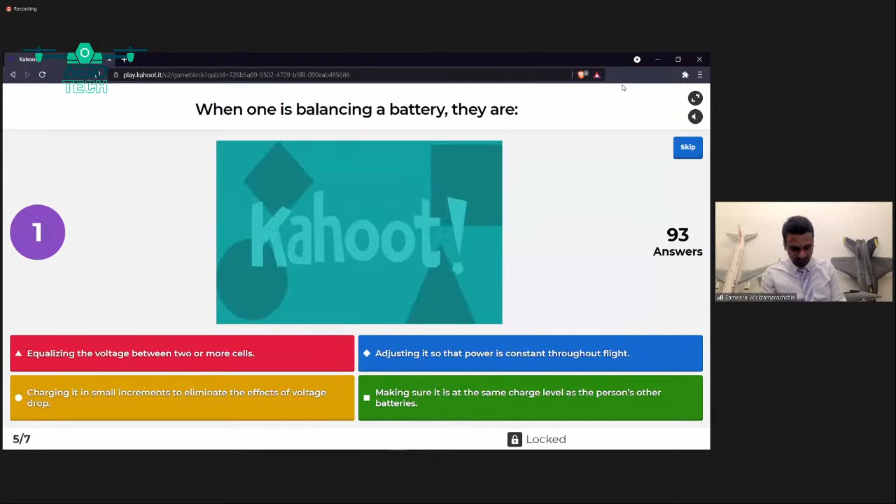When one is balancing a battery, are they equalizing the voltage between two or more cells, or are they adjusting it so that power is constant throughout flight? Or is it charging it in small increments to eliminate the effects of voltage drop, or making sure it is at the same charge level as a person's other? All right, the answer is equalizing the voltage between two or more cells. Going on to the points, we have a new lead here. It's Kaminder with 4,251 points.

Great. So the sixth question: for a traditional aircraft, a good rule of thumb is to have the center of gravity approximately where? So it was a question where Sir did demonstrate as well.

So hope you all remember the right answer. We'll see who gets it correct. Yes, the answer is approximately 1/3 of the way back from the leading edge of the wing. So Sir had a small demonstration as well, and he showed from which point it is. We'll see who gets the correct answer here. It's Kisal now with 4,568 points. Remember, guys, the quicker you answer, the more points you get.

So going on to the last question of the quiz today. So a 2,700 Kv motor with no load should spin the shaft at 2,700 RPM for every volt supplied, spin the shaft at 270 RPM for every volt supplied, or spin the shaft at 2,700 RPM regardless of voltage, spin the shaft at 270 RPM regardless of the voltage. And the correct answer is spin the shaft at 2,700 RPM for every volt supplied.